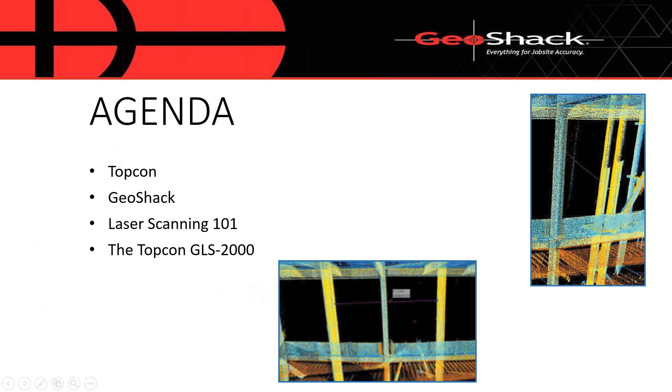So real quickly, I'll do just a couple of slides on Topcon, that is our manufacturer, and introduce you guys to GeoShack. We'll cover just a little bit of laser scanning 101, and then I'll introduce you to the Topcon GLS 2000.

So not to delay, Topcon, you might have heard of them. They were established in 1932 in Tokyo as an optical instrument company. They since then came stateside in the 70s where Topcon America was formed, and they're still based over in California today.

Some of the things that you might see Topcon positioning-wise, today we're talking about laser scanning, that's just one of their business units. They specialize in GPS, machine control, lots of different things, lots of different products for lots of different applications. If anybody has any questions about that, we'd be happy to answer them afterwards.

Really quickly, so talked a little bit about Topcon. So GeoShack is the world's largest Topcon dealer. We service many different markets, many different segments. So here today we're talking about BIM and MEP construction, but if anybody else has any questions, maybe underground, dozers, something like that, we'd be happy to talk with you guys offline.

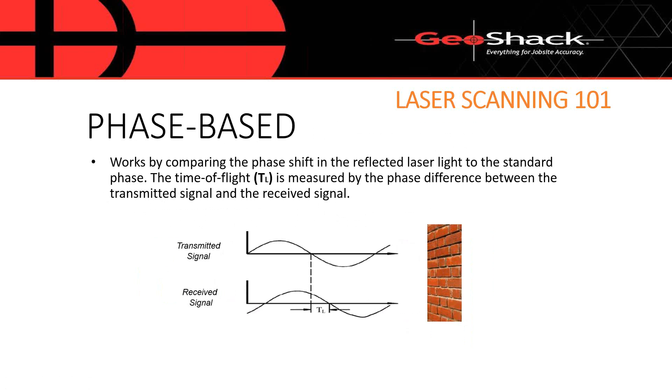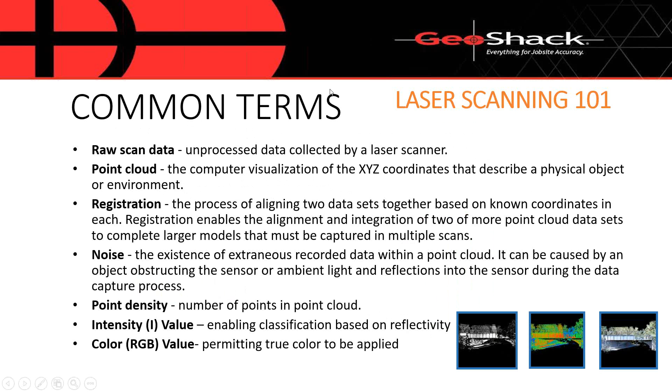Some common terms that you guys hear, I'm sure you've already all heard them, but raw scan data is coming out of the laser scanner, point clouds, registration. So whenever we have scan positions, multiple scan positions, we'll register them, eventually export one point cloud, and then turn that over to you guys in the office to mine, or send it over to run through a program such as ClearEdge, to do some automation, some modeling automation, lots of different great features.

They've got what they call, and then also too, the GLS 2000 is Topcon's third generation laser scanner. They have had two previous models. They were great at the time, but now they're a little bit obsolete. So they've rolled different types of technology into this product. Right now, like I said, the Precise Scan Technology II is where they were. The Precise Scan Technology actually came out on the first gen scanner, but then they were able to tighten it up and clean it up in the latest release.

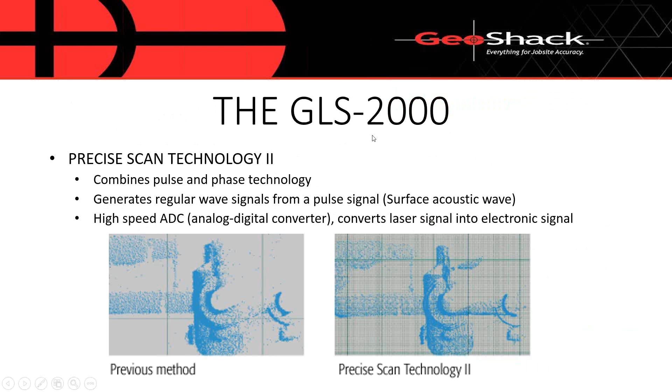Some key features about the GLS 2000: we've got selectable lasers, so if you're working somewhere where you need an invisible laser, that is definitely an option. We've got the full dome view, 360 on the horizontal and 270 on the vertical, and several different modes to choose from.

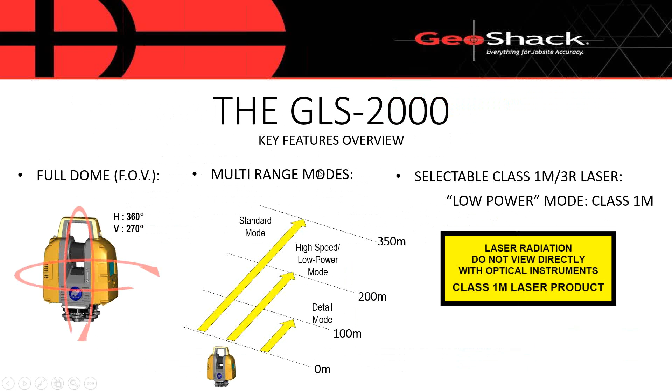We actually have on here the GLS 2000M, which is a 350 meter. It also comes in 130 meter, and it also has a 500 meter range. So there are different applications where we would use these different scanners. We'll be happy to answer any questions about that as well.

The only scanner on the market that you're going to see with an occupation and backsight option is the Topcon GLS 2000. What that means is we're able to set this scanner up in the field over some control points, and then right then and there, our scan is geo-referenced to our model coordinates. It's the only scanner that can do that.

A couple of other features: we've got easy operation down here. You guys can see a screenshot of the actual scanner. So everything is good, all we have to do is just hit start scan. It's very easy to actually do the scanning process.

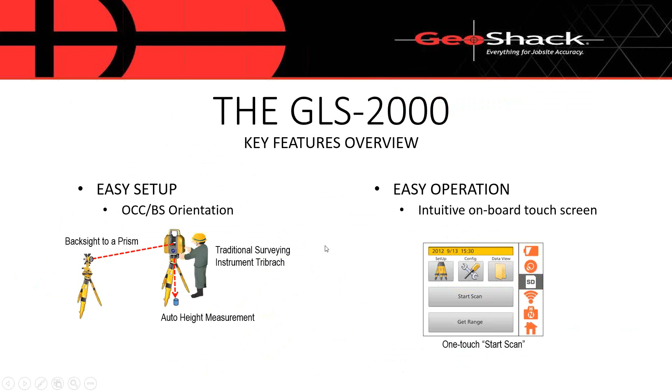Once we are done scanning, we would then export our raw data via an SD card onto our PC, bring it into a proprietary software of Topcon called ScanMaster. They're also in their third release of the software.

It's a very strong point cloud processing software. It has a lot of automated extraction, like edge extractions. We can create meshes, lots of different details that I can go into. So if anybody has any questions of what we can do inside of ScanMaster, please let me know.

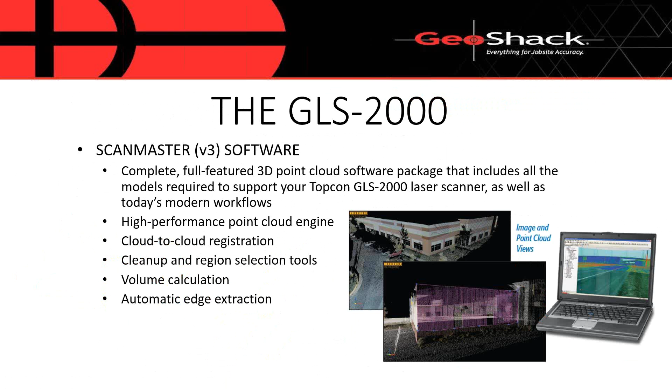I mentioned the occupation backsight routine to register your scans. There are actually two other ways to register scans. So if we don't have control points, we can actually go out there, set up our scanner, and still collect accurate data. We can use targets.

We can do cloud to cloud. My preferred method is go out, occupy a backsight so that we are geo-referenced, and then basically cloud to cloud register all of the other scans to that geo-referenced scan, the initial scan. So it makes for a great workflow, very fast.

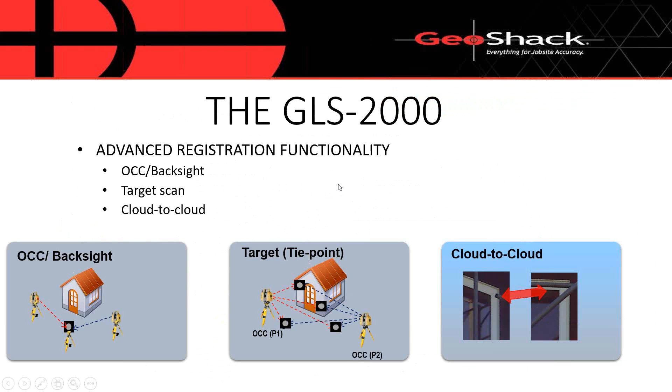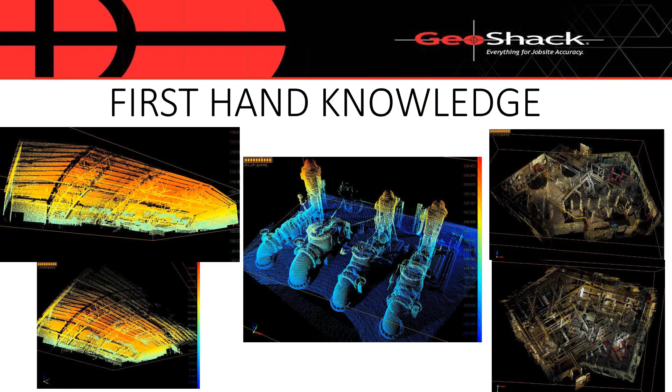First-hand knowledge, so if any of you decide to actually do work with GeoShack, we've got great staff. Our trainers are excellent, tons of knowledge still in laser scanning. We've been doing it for a really long time, and we have a lot of knowledge and expertise to pass on to our customers.

Really quickly, I've got on here just a success story of a couple of guys using it. In this model, everybody can see they've got a lot of mechanical systems going on. This is actually a hospital that's being built right now, where we're going in there and using another one of ClearEdge's programs, they'll probably talk to you about, to compare our model data with what we're scanning.

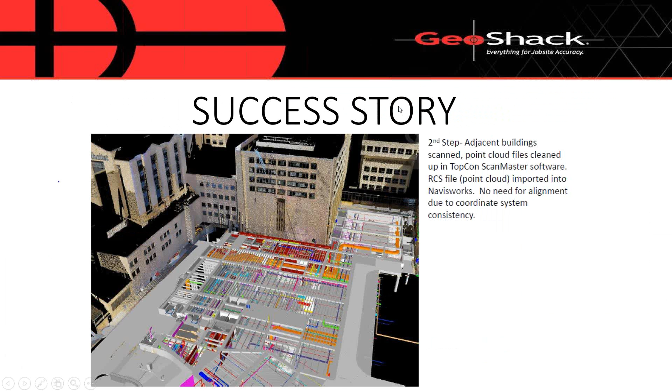So Mark, that's all I've got on the GeoShack. Like I said, if anybody has any questions, please type them in, and we'll go from there.

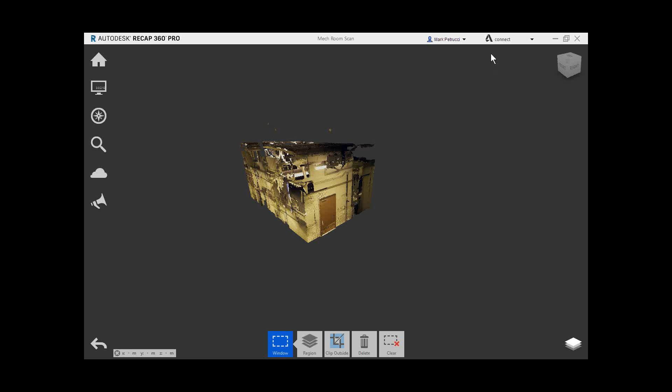Before I do that, first thing I would highly recommend, whenever you're working with point clouds, a product available through Autodesk called Recap. The Recap 360 Pro gives you the ability that when you receive multiple scans, you can register them or stitch them together to form one large scan of your model. That's possible with scans from any point cloud.

However, if we use the points that we receive from the Topcon data, they have coordinates assigned to them. So most of the time when we bring those scans in, if they're using control points, they come in and align perfectly right off the bat.

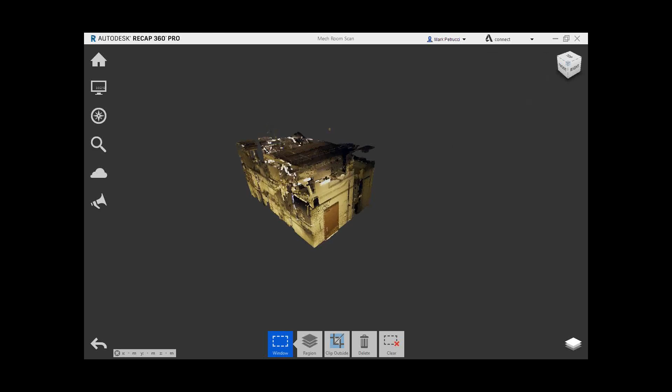In this example, this is showing you what the scan looks like inside Recap. I highly recommend that no matter what scan you receive from any scanner out there, you bring it into Recap first. Once you bring it into Recap, then you want to go through the process of exporting out those files.

You export it out as an RCP or RCS file. That will take that point cloud, which can be a very large file, and it will reduce the size considerably.

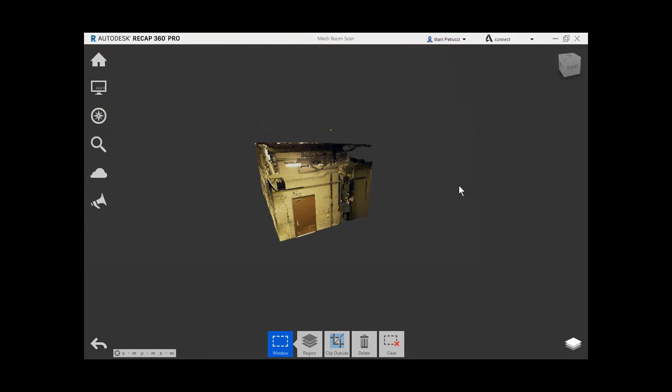Now, while you can bring point cloud data directly into CAD and Revit and Navisworks, if you go through Recap first and then save it as an RCP or RCS file, when it comes in, the file size will be reduced, and CAD, Revit, Navisworks does not have to take the time to process it. It all happens automatically, so it's already been processed here inside of Recap. So now this is the model inside of Recap.

This is a mechanical room, and I can do things like fly through the model, and I have some other functions. Unfortunately, this scan is a rather clean scan on the outside.

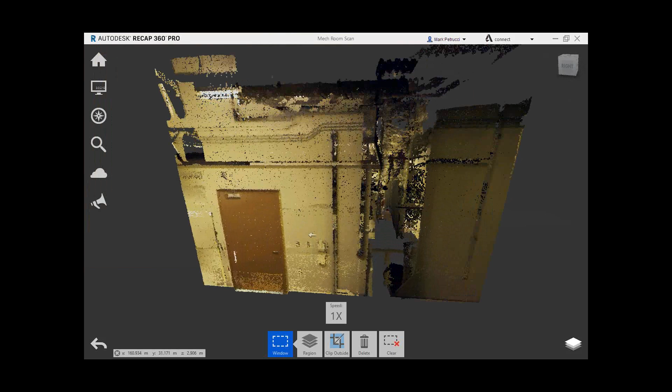I'm going to show you another scan that I can demonstrate some features and functions that I've preset. So here's a mechanical room. I can set it up where I can view from the point of view of the scanner, so it looks like an image. Notice the points here, on the left-hand side you can see all the individual points. They have a color assigned to them, so it looks like an image. Then with that image, I can make out what the equipment is, the piping, the walls, the windows, mechanicals, whatever it is that scan has captured.

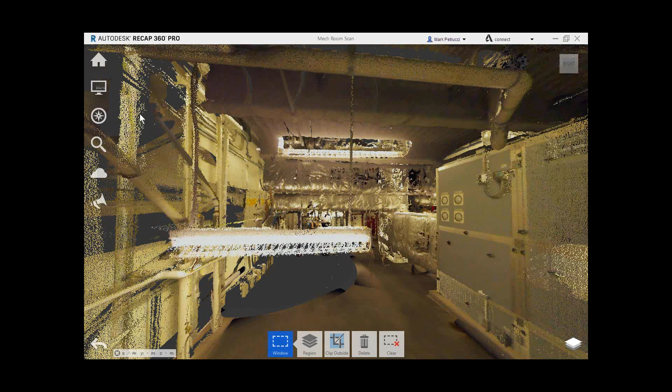What I'm going to do to demonstrate another workflow is just show you this scan right here. I did this scan because it demonstrates something we did live. Chad and I did this live, gosh, more than a year ago in Kansas City, and he set up a scanner inside this room. It actually shot through the windows, so it was picking up points outside our room. So here's a good example for using Recap to filter out some of the data.

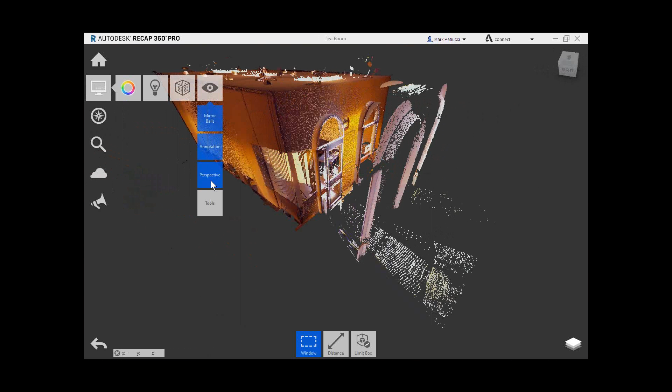I don't want to spend too much time in training mode here, but just to show you, if I go to my limit box, I have the ability to filter out some of the data. You'll notice my scan data and this box are not positioned the same way, so I can take this by simply clicking on the edge and rotate it. Right at the bottom it says click to edit this box, tab to edit the dimensions, or hold control and click on an edge to rotate the box.

So that's what I'm going to do. I'll take this, rotate it, and get it lined up, and then from there I can filter out some of my data. I'll go ahead and confirm. So I always tell people, do whatever cleanup you can inside Recap first, then export this data out, and you can bring it directly inside of Revit or CAD.

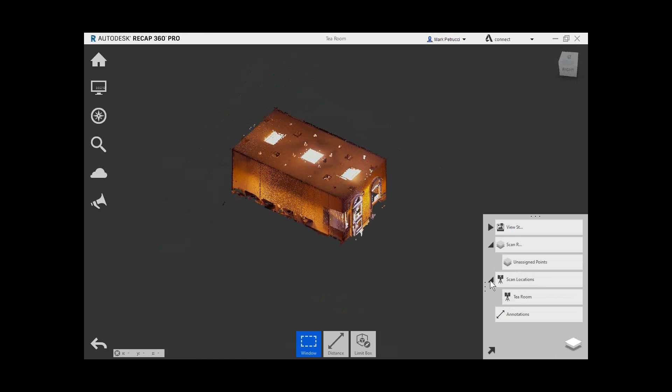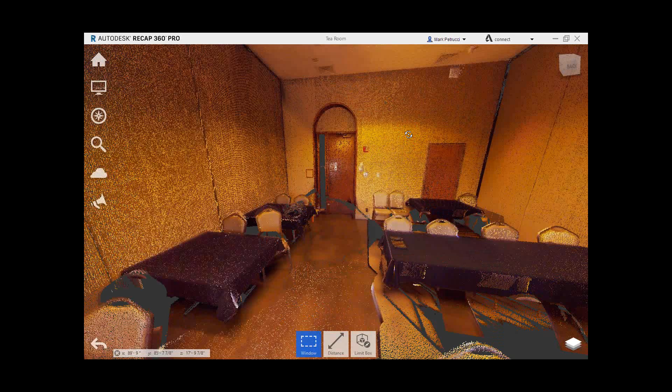Now just to show you some points of view here, here's what it looks like inside. This is the level of detail that you can receive. So if I had mechanical systems overhead, I could actually look overhead and I'll see if the ceiling's not there. I can't record that, but I do know where at least my diffusers are.

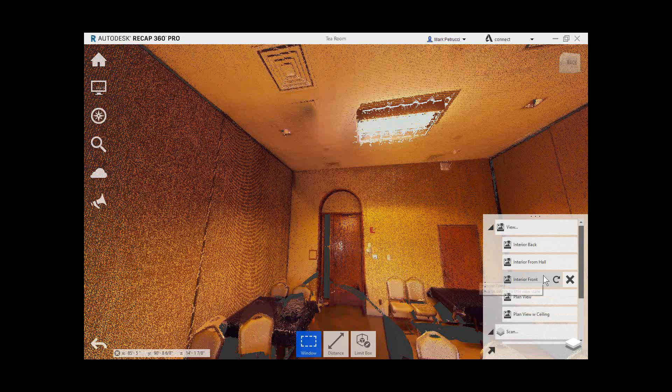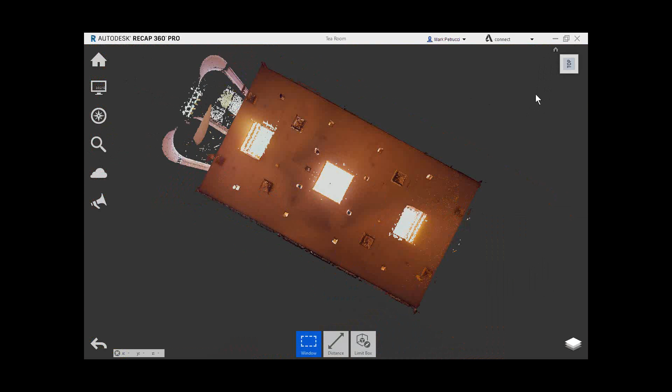When I created an as-built model of this room, I needed to locate those diffusers. I assumed all these diffusers were 2x2, and actually there's one in here that's a different size. I realized when I started modeling that the diffuser right above this window was actually not 2x2 - it was smaller, 18x18. So this is the diffuser right there. It's a little bit smaller, but during field verification or field measuring, I may not have noticed that with a simple tape measure, but with the scan, I was able to see that and measure it.

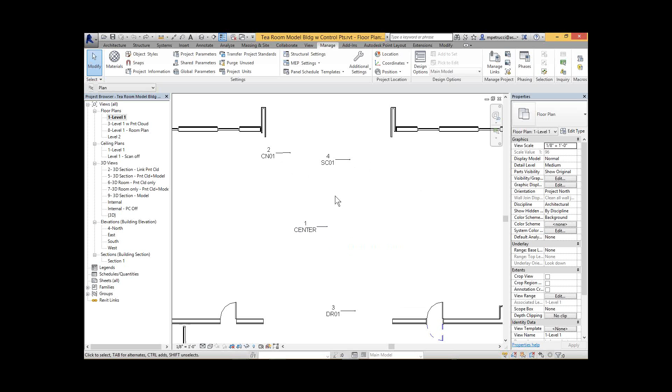Now that is using Recap, and just to demonstrate the control points and their purpose, especially in the MEP world, if you need to tie into existing systems, you want to know precisely where they are. Again, this project we did live, and in this case, I did have these control points. They have an XYZ coordinate system assigned to them. So with these control points, I gave these to Chad. He entered them into a scanner, and when I brought the scan into my project, it came in precisely. Now just to demonstrate that, this is what happens with just about all the scanners out there.

I'm going to do one thing here. I'm going to go ahead and set up my location because I do have 3D scan control, so I have a coordinate system set up.

With any other scan that you bring in, if I was to insert that scan - here's my point cloud, and I'll bring it in one of three ways. I'll first do center to center, and this is very typical. When I do this, notice the scan is just kind of hovering over here in space. Well, that's not going to work for me.

So if I do this again, and select that same scan, this time instead of center to center, I'll do origin to origin, and hit open. It's closer, but it's still not rotated properly, and I would again manually have to slide that around. I would rather have this scan come in precisely where it needs to.

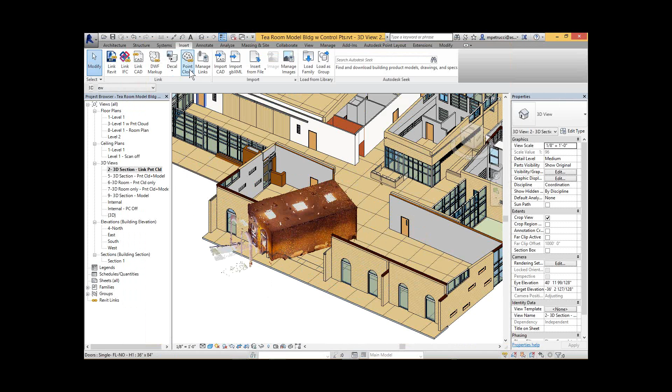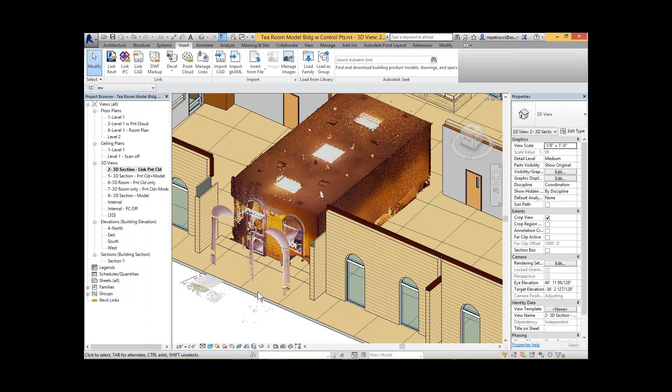So instead, I'm going to take advantage of the control points that I provided to Chad to put in a scanner. So I'll select my Tea Room, use my coordinate system, and when I click open, the scan pops up exactly where it needs to pop up. So in that way, I know precisely, so for my MEP system, my piping, my ductwork, even structural steel, if I need it to line up with an existing model.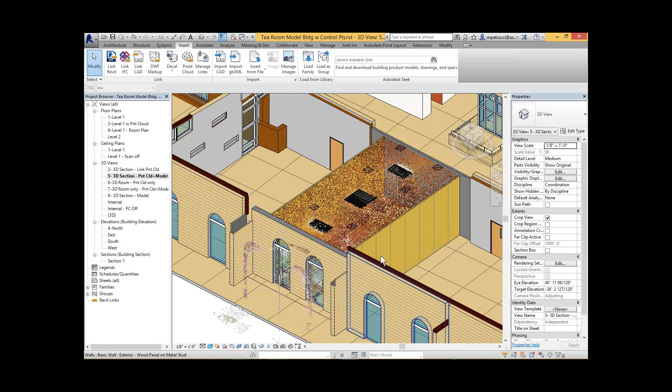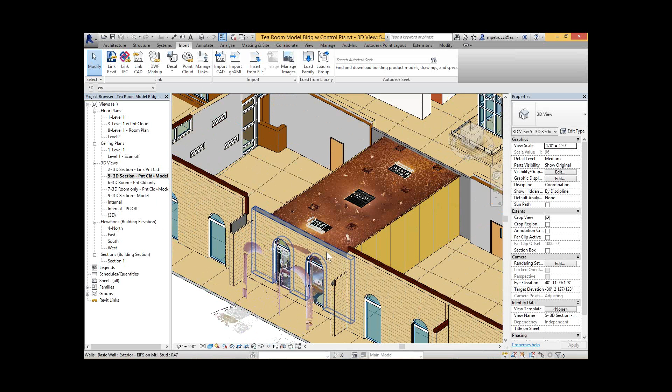There's no better way to do that than with control points. And just to show you some of the things we can do once we get into CAD or Revit, I can start tracing over it and modeling it. Now in this example, I had to manually trace over my scan, and with walls, doors, and windows that's pretty easy. But with MEP systems, a lot of piping, ductwork, even structural systems, it could be tedious and time-consuming. So a better way to do that before I bring a scan into my Revit model is to use a product like ClearEdge 3D and their EdgeWise tool. That'll automatically convert it into model data, and that's what I'll let ClearEdge demonstrate for you. But for those who want to see the need for using control points with scan data inside my Revit model, this is why we work with control points.

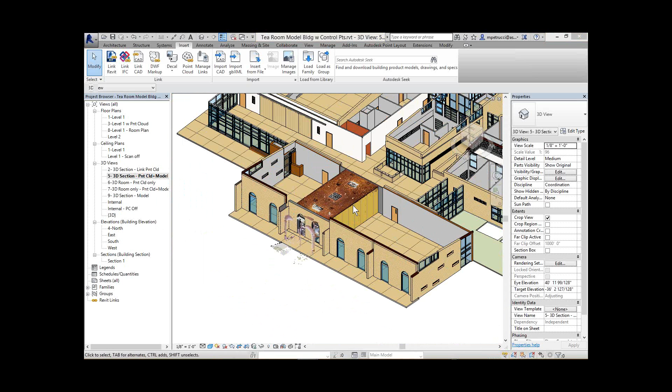Okay, so I'm Justin Domer. I'm with ClearEdge 3D. I'm one of the tech support people who work with customers throughout the process of learning and teaching, as well as testing the data. So I'm with ClearEdge 3D here.

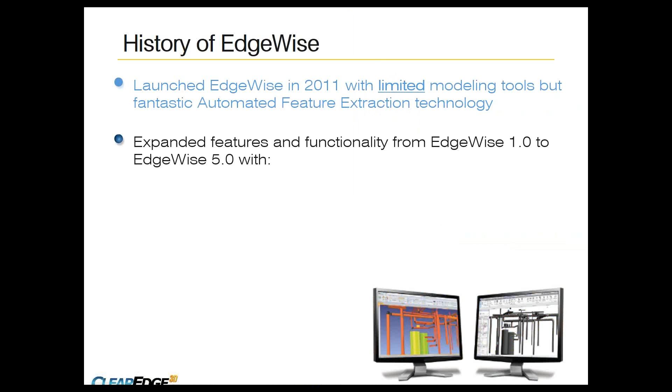ClearEdge 3D, we launched in 2011, and the idea behind it is to automate the process of extracting objects, 3D objects, from the point cloud data. Right now we are on 5.02, all the way back from 1.0, so we've definitely done a lot to improve EdgeWise. We're constantly working on adding new features and functionality. Currently, we're able to do piping, ducting, structure, and building, more over MEP products, and we're able to do that through EdgeWise and then export them out to various software.

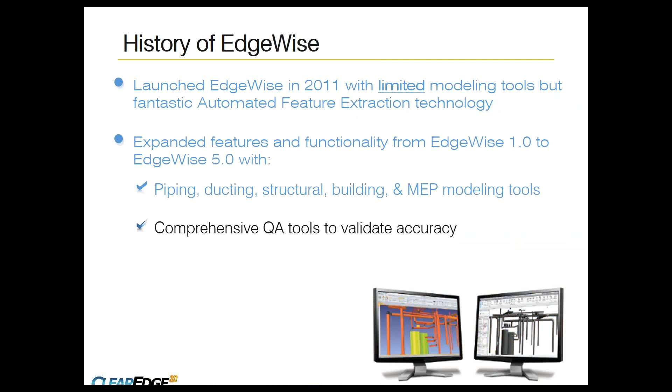Some of the most interesting things we'll take a look at is the actual QA tools. The QA tools we have are able to give us a really in-depth view into how the objects we're creating in 3D are aligning with the point cloud. That's something that's not very easy to do, and we are able to do that very well. And then some of the various software we can export out to: Revit, which is what we're going to go into today, Plant 3D, PDMS, CADWorks, AutoCAD, and a couple other different ones. So we have a lot of options we can go through, as well as importing a lot of different scan data.

And then, based on the scan information, we can reduce the modeling time significantly, up to 50 to 75%. I've seen more with different models. So it depends a lot on the scan data, but we can do a lot of work very quickly without having to use man hours, which is definitely a big advantage.

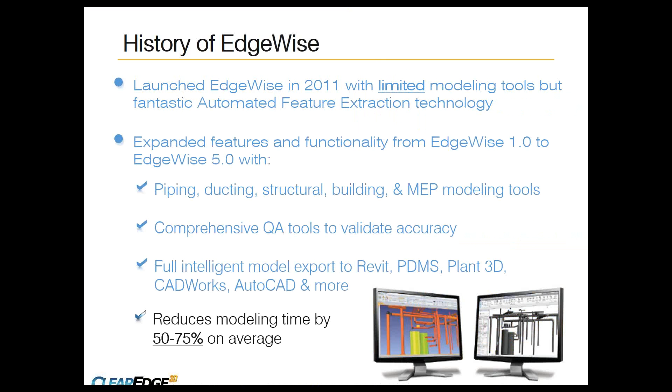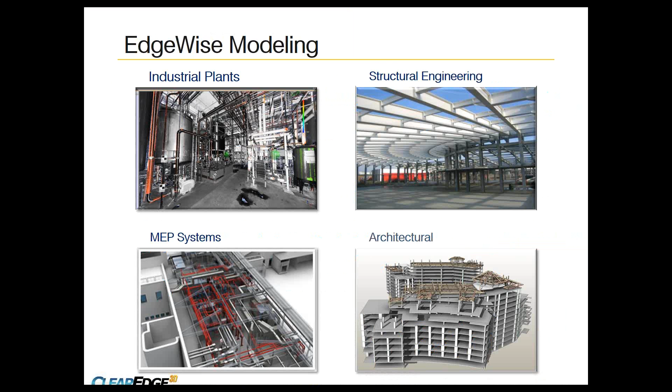So with that, I think I'm going to just go ahead and jump directly into the live demo. With this demo, I can show some of the different tools that we're going to be using and actually working with.

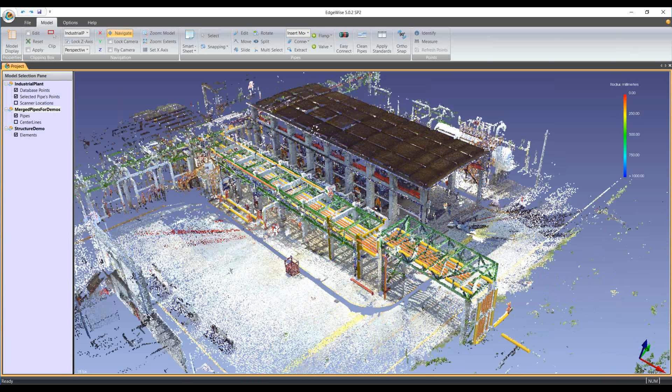So what we can see here on the screen is an industrial plant that we work with. The scan itself is from about 22 scans, so it's not very large, and it took about an hour and a half to process. With that processing, we're actually able to extract all these objects automatically. We can see we have a lot of stuff extracted just through computer time, on just a standard computer, able to go and extract these cylinders from the point cloud. So this is actually square one, this is where we're going to start from and work our way out of.

This is a lot of where the time saving is going to come from, the fact that we can automatically find a significant number of actual pipes without having to do any man hours. I ran it, went to lunch, had a meeting, came back, and you can even work on the computer while it's running in the background. So it's definitely a significant portion of the time saving. This is where we're going to start from and work our way to our final product.

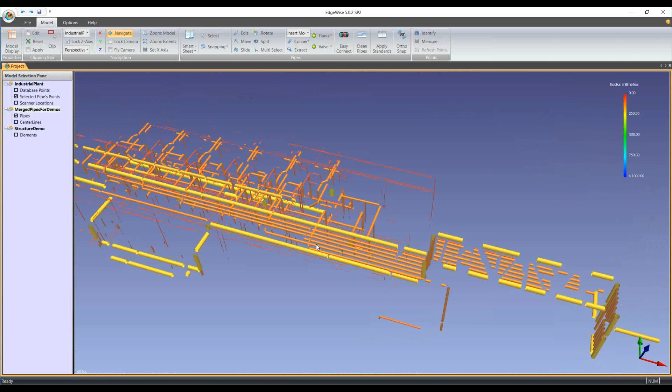With the final product, the first thing we're going to be doing is our QA process. Those QA tools we mentioned before, the most important one of many that we have is our smart sheet here, and this tool allows us to actually look at the individual pipes and then how the point cloud actually lines up with those pipes.

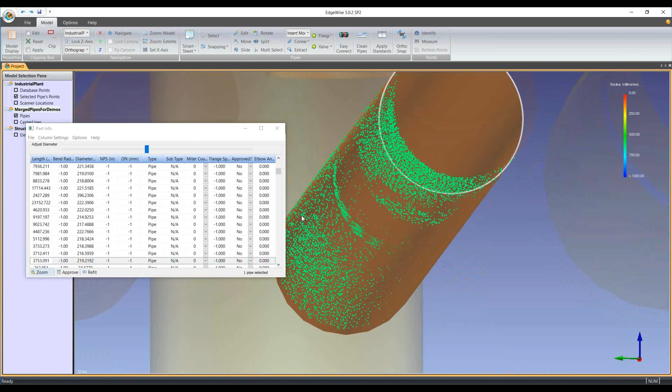What we can see here, this is a boresight of this cylinder, so if I move around I can see these are all the points associated with this cylinder's extraction. We see that information, we can see the quality, and based on the fit of the curve and the points, we can determine if this is accurate. We can literally tab through very quickly and see if it's right. If it's not correct, we can delete it, or we're actually able to adjust the diameter on the fly to make sure that we have a good fit. So this is one of the most important tools for QA that we have.

This allows us to go through that process and very accurately determine that things are fitting to the point cloud properly. Now, the nice thing about this is we don't have to look at every single pipe that's created. When we actually do this automated extraction process, there can be thousands of pipes that are extracted, which is great, but we can actually narrow it down to the ones we really need to look at.

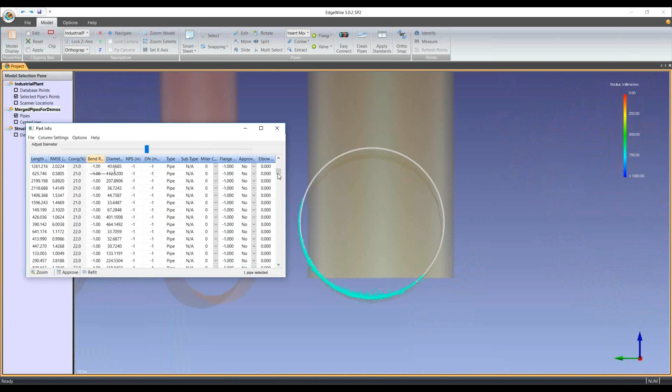And that specifically is talking about coverage. If I actually look at this, I am not really concerned about looking at cylinders that have 80 to 90% coverage. That's something I don't really need to look at, so I'm going to look at the lower coverage elements to really determine what needs to be done. So this is the QA, and that's just a very powerful tool that we can work with to make sure that everything that's automatically done is accurate.

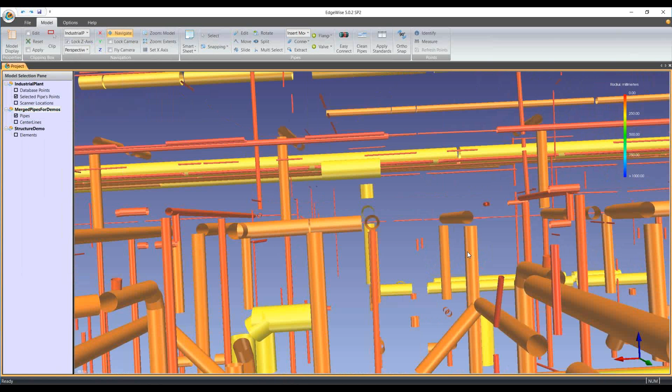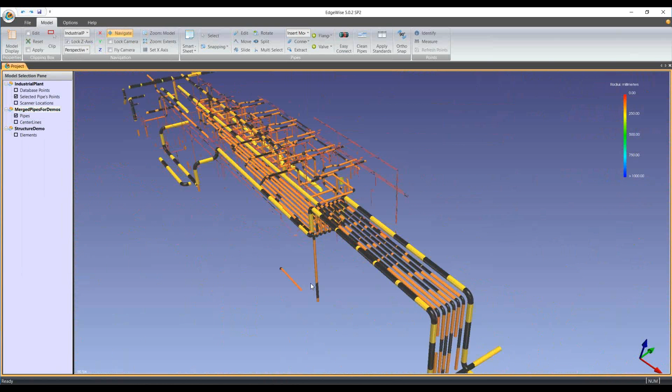Now that we've gone and QA'd the process, we need to start making connections. And so that process is done both manually and automatically. We have these gaps that we need to fill, so I'm going to just go ahead and run our automated tool here. This Easy Connect tool is going to go through and make connections, both elbows and straight connectors, and do as much as it can automatically. With this, we see that we filled in a significant portion of the main chain runs of piping here, as well as some of these different sections.

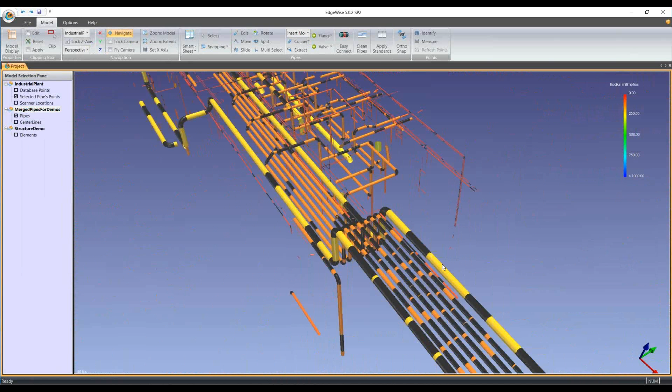Anything that wasn't automatically done, we would go through and manually do, and we can actually do that process very quickly. It's literally connecting the dots. It's a very quick process, very simple, and then also we can extract objects if we need to. But that's kind of the main function and the main tools we're going to be using for filling in connections. As we can see, we've done most of it.

With that process being completed, now we can actually clean everything up. This process is just going to finalize the connections. It's going to replace all these black pieces with actual pieces of pipe and give us the final information. The whole point of this tool is to give us as-built conditions, and so we maintain these as-built conditions to show that there are deviations in the pipe.

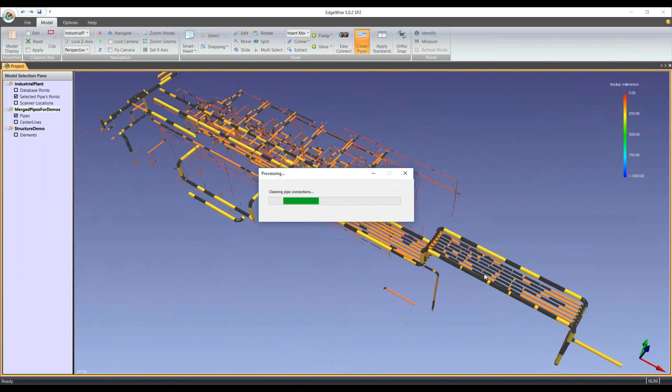If we actually look at one of these pipes here, this is a good example of a straight pipe that's not actually straight. If we take a look at the point cloud and see how the pipe is actually running, we see that it is not a straight connector or straight run of piping, but we're representing that accurately with the software. So we've actually managed to do that. It's the best of both worlds.

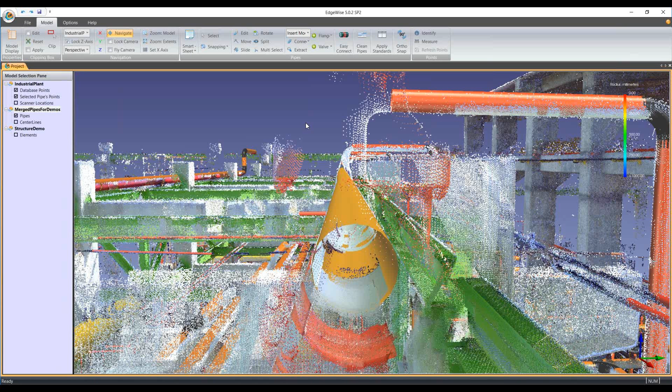Now that we've actually filled everything in, we can add our intelligence. We've kind of finalized the connections. At this point, what I'm going to do is give us intelligence. Right now, we haven't done that—these are just raw values from the point cloud when we extracted these objects.

So what I'm going to do is apply our intelligence to the model. That's done with our Apply Standards option. We can do this on an individual basis or a group basis, but as a time-saving function, I'm just going to go ahead and run this.

We see that we have specs from around the world. It's also very easy to create your own. These are literally just spreadsheets that you can import and export and edit, with different pressure ratings from those same specs. So I'm going to run this.

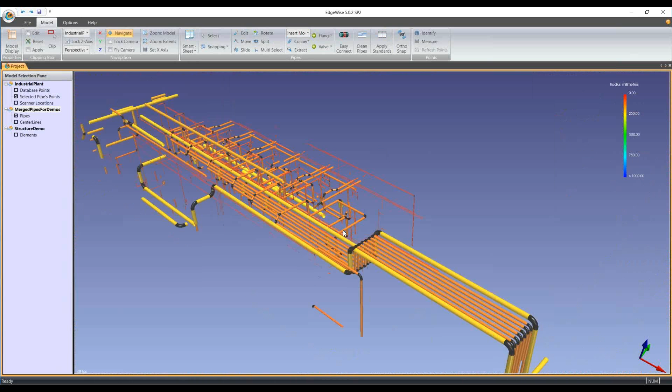Visually, nothing's changed, but if we look back at the same view, we can see now that it has our intelligent values. These have been changed. We have our actual nominal diameters, and we have the intelligence for the full product.

Some other things we can do, especially going into Revit, is I can sort by diameter. I'm going to grab everything under 2 inches, and instead of exporting as pipe families into Revit, I'm going to export them as conduit families here. So at this point, I'm going to go ahead and export.

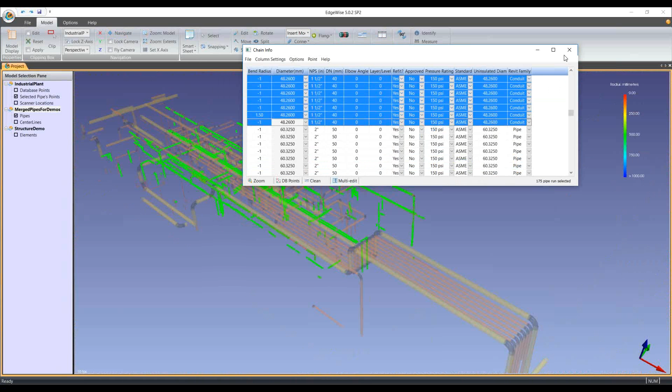So we can do that for ducting as well. That pretty much takes care of all the tools that we have for Edgewise to actually go into Revit. So at this point, I'm going to go ahead and export out to Revit.

And it's a direct handoff inside of Revit. I have Revit already open. It's a systems template—Edgewise default has the systems template, and then there's a plugin. I'm literally going to just hit open model and select the file that we just created. This is going to go through and create those elements as native objects inside of Revit.

While this is thinking, I'm going to go back to Edgewise and talk about some structural elements. In this model, we also have some structure we can look at—the structural elements, where we can actually model the supports that hold up the piping we just created. So I'm going to hide the piping and bring in some elements that I've already extracted.

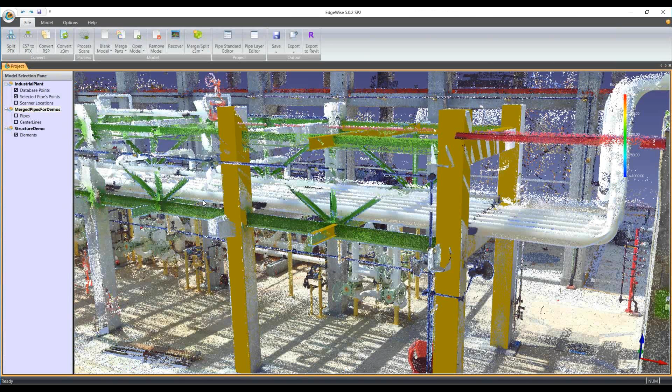With structure, we have a couple of different ways. It's a little bit more hands-on because we need to tell the software more information about the type of element we're going to create. But in this case, I'm going to make some I-beams. I have a steel standard here, but we have various ones.

I have I-beams. I'm going to create an I-beam and say auto-fit, which will look for all the different types of I-beams that we can create. I'm going to go ahead and extract them from the point cloud—literally just drawing a box around the points, and this is the same for piping as well.

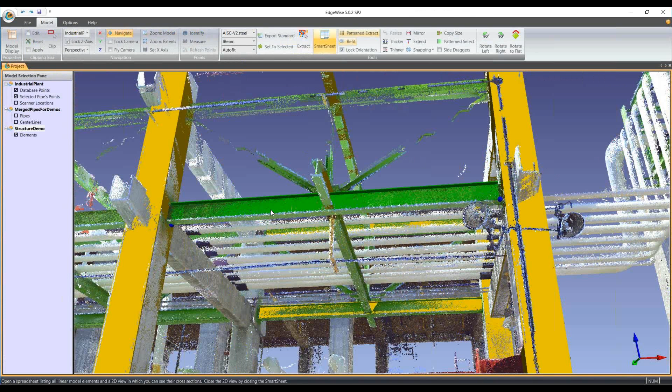Once I've extracted that, I can look at that element, shown in green, and see how the points line up. I can move this object around and adjust it, resize it to create a new element. And we also see that its role is going to be a beam inside of Revit, so we're actually bringing that in as a proper family.

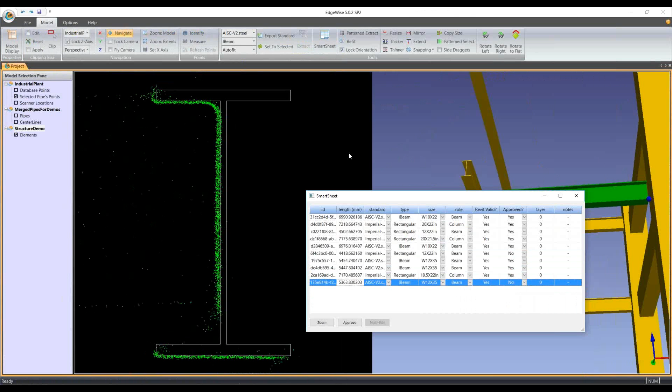So with that, this one looks good. I'm going to do the one right above it and do the same thing. The nice thing about this is that I can go through, based on the points, and that looks pretty good—about as good as I'm going to get it there. I'm also able to extend these.

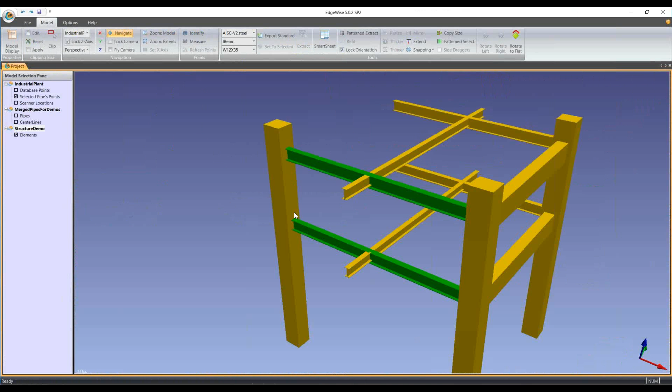Now, with this modeling section, I see that I could go one at a time for the rest of this, extracting each element individually. But we also have a tool now that allows us to recognize patterns in structure and take advantage of those patterns—that's done with our Patterned Extract tool.

The idea is we create these initial elements, and I'm literally going to say look for these initial elements. I'm going to define a distance and spacing to look for, and it's going to go through and try to extract all these objects as fast as it can, finding these elements from the point cloud.

If it doesn't have points to do that, then it won't extract them. There's also a tolerance for finding these objects. So while this is going through, I'm going to go back to Revit and take a look.

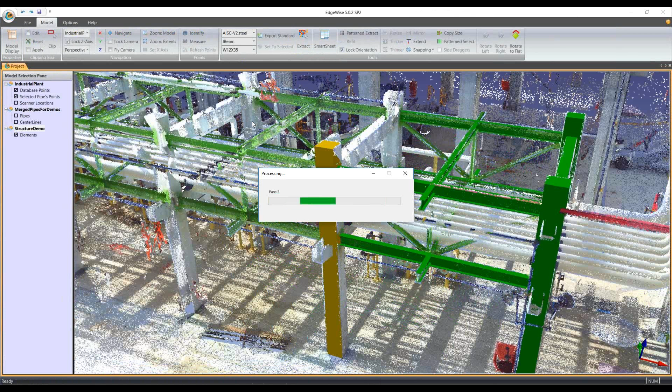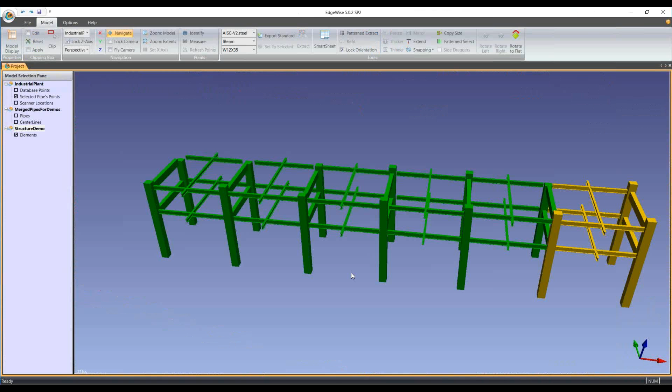Now I'm going to go back to Edgewise. Inside of Edgewise, we've finished our Patterned Extract, and we can see that we've managed to extract all of these objects now based on the Patterned Extract. It stopped where it needed to because the points are no longer there. That's how we can bring these elements in.

Now, the process of working with this—I would go through and QA everything—but we can see, if I go to the very end of the line here, that this is still an accurate fit to the point cloud. Even though it was automatically done, we can still see that we have our accuracy maintained.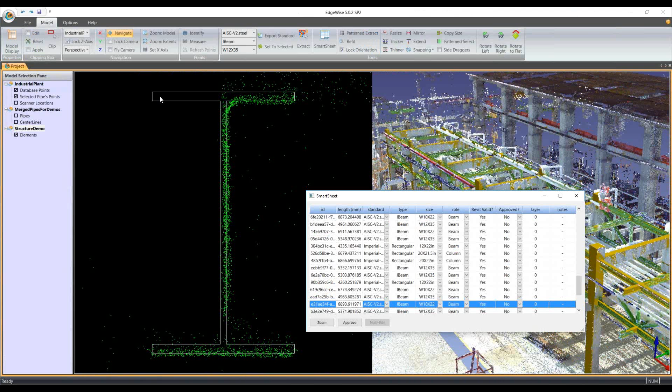And that covers pretty much all of the tools we're going to go through inside of Edgewise. At this point, now that I've created all these elements, I need to export them as well. So I'm going to do the exact same process: export to Revit, hit go, yes, and then inside of Revit, repeat the process. I'll go here, open model, and select the file we just created.

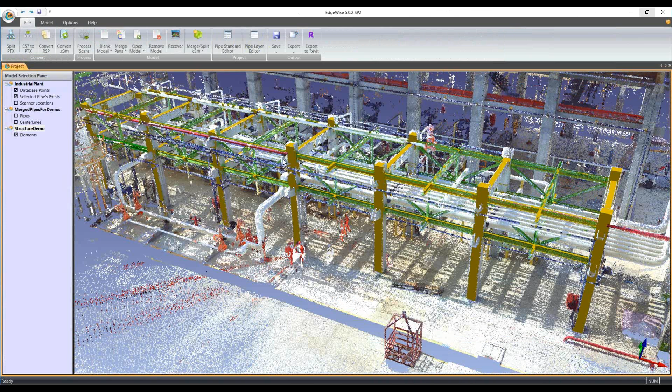And then we'll be able to import those objects in. Edgewise does not change the coordinate system, so we just bring these elements in exactly where they're supposed to be, and then we can even bring the point cloud over top of it using an RCP and/or RCS file, just like we normally would. And then we have those elements in.

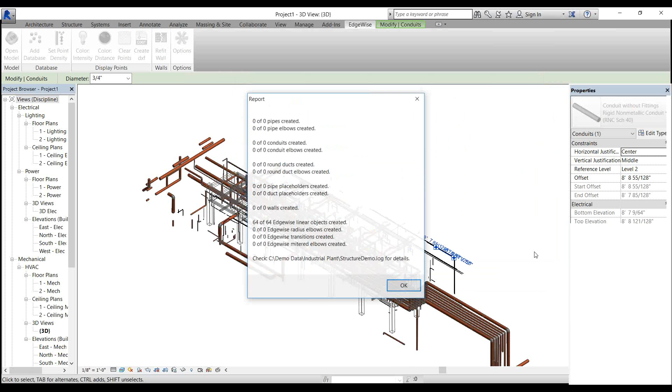With this, I can now change to a structural concept. There we go, and I can see that I can select these files. These are native structural elements that we created inside of Edgewise and now have brought inside of Revit. So that's an example of our structure and our piping coming together and working on a specific project.

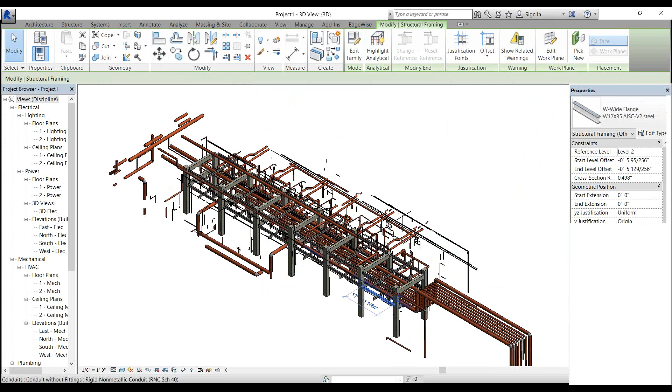The only other thing I want to show really quickly is our ducting model, which is very similar to structure. We're going to create straight pieces and extract them. You have the same QA tools, and then we can make these flows. It's a very quick process to do somewhat of a complicated duct run—this is something that would be pretty difficult to do inside of Revit natively.

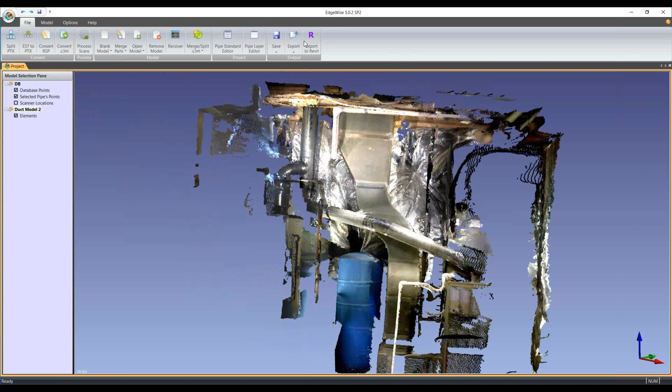With this, I'm going to extract this bottom piece, and I literally just need to draw a box around the bottom section, and that's it. I can adjust its height with this little arrow in the background, so that looks good. I'm going to go to the back and extract another piece. It's a very simple, pretty quick process to just go through and extract these objects.

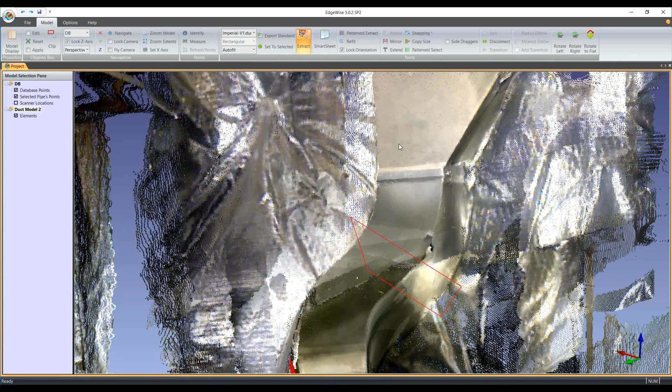If it's not quite the right size—which this one isn't—that's okay, we can fix that in a second. And then I'm going to do the top one. I just want to get these pieces in here, and then once they're in, I can QA them. That looks pretty good. I'm going to select this one.

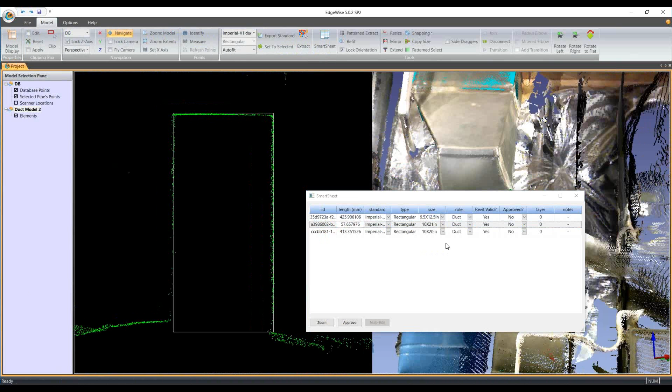As part of the QA process, this is going to look very familiar—we have a 2D view. I'm going to resize this element and make sure that we have the right size. So that looks better, and we can see all the fits are looking pretty good. I'm going to go ahead and say those are fine. Once this is set, then we can go through and do some alignment stuff, but we can very quickly fill these in. So I'm just going to align these up.

So with this, the last thing I'm going to do is make connections. Between these two pieces, I'll hit a radius elbow, and this is going to add a transition in for me automatically. So it's going to add this transition in. Now all I need to do is adjust it.

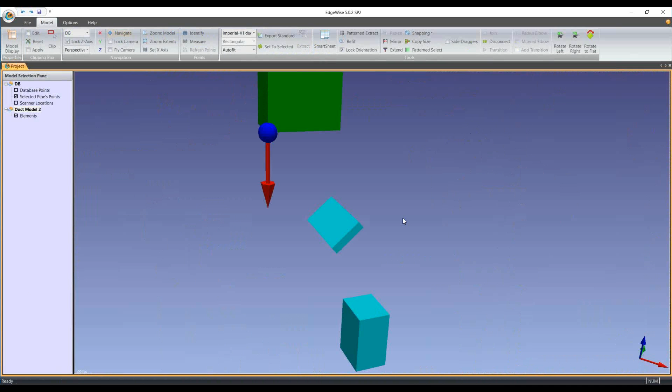Within 20 seconds, I'm able to extract the top piece and create the elements that flow through this. So that's the top piece, and now I'm going to repeat the process for the bottom.

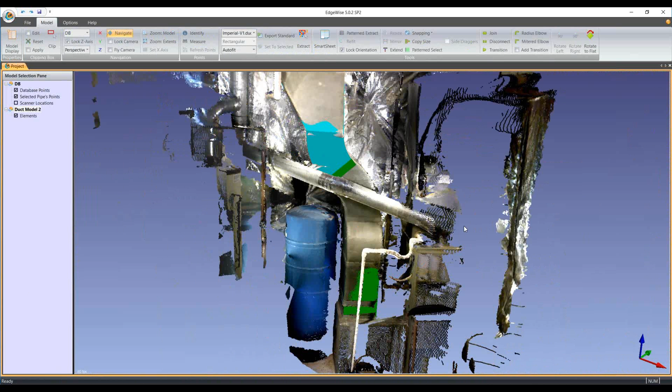We can see that we've managed to extract this very nicely to represent this section. In 30 seconds, we're able to do that process. So we can see everything's fitted nicely, lined up properly, and represented accurately, and they're all still connected as well.

These are going to go into Revit the exact same way, so I'm going to export this out to Revit and bring it in as well. It's, again, a very quick process, very accurate, and a very simple flow for how we create these.

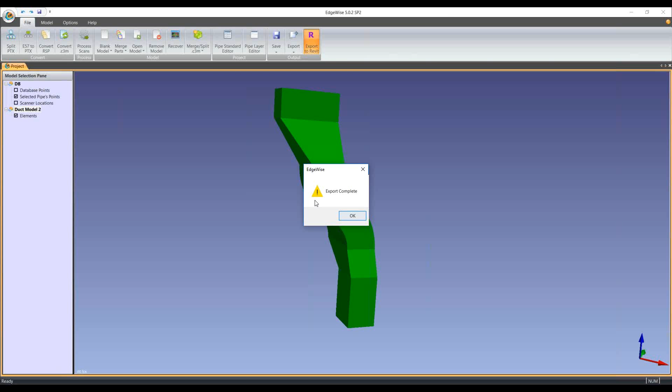I'm going to go ahead and do a new systems template and then import these in. These go in as native Revit objects and fill in that way, and it's, again, one click. That's all it is — we just need to select the file.

Those will come in over the next 10 seconds or so, and they'll come in as native objects that are all connected properly inside of Revit. So those are all in. Let's take a quick look — if I select a transition, I see it's a native transition.

If I select an elbow, I see it's an elbow. So this has been brought in and they're all connected and shown here. Again, a very quick process for getting these real-world objects out of a point cloud into native software like Revit.

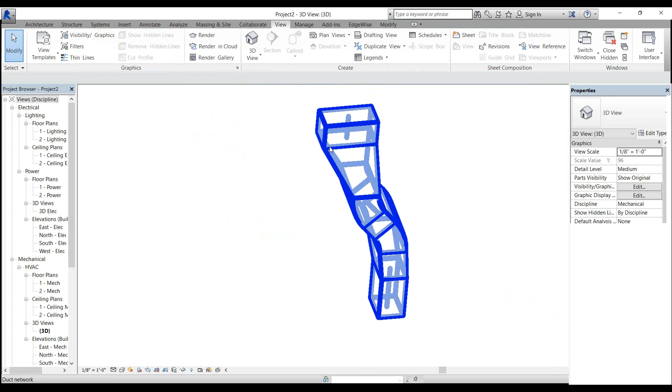The same process goes for AutoCAD or Plant 3D or any other software we export to. Depending on how much time I have, we can show the building and architectural side of things as well — that's another option, very quick to show those.

But again, the whole idea is that we're going to be very quick in actually bringing these elements out of a point cloud and into Revit or AutoCAD, moving as fast as possible, because the whole idea is to save as much time as possible.

I can show building here in a couple minutes, maybe one or two, but at this point I think I'm running out of time, so it's probably more just to show the stuff we have. I don't really have much more to show, but the idea for building is just to go through and bring the walls into Revit as built conditions.

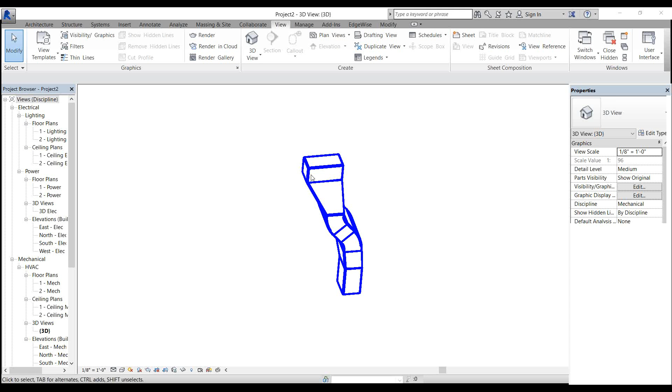Actually, I see she has sent me a list, so let me read off some of the questions here. This one's for GeoShack — Thad, about how long would it take to scan a typical hospital floor? I know this varies greatly based on project parameters, just looking for a ballpark.